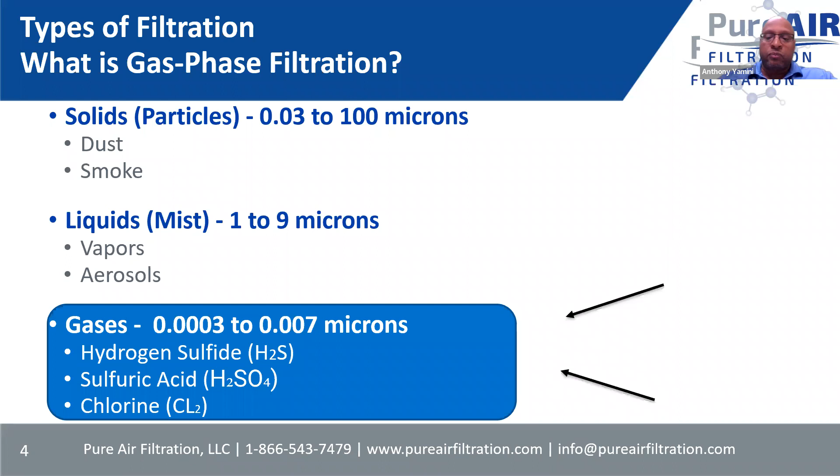To give you the size of gases, it's 0.0003 microns to 0.007. Just to give you a comparison, human hair is about 100 microns. That gives you an idea of how small these molecules are. Some of the common gases removed are hydrogen sulfide, sulfur dioxide, chlorine, ammonia, and other VOCs as well.

This illustration shows how, in a typical chemical filter, the odorous or contaminated air passes through the absorbent media and is purified. In the direction of airflow, you have the contaminated air. In this section, you have media that's already used up and spent. And this active transfer zone, or working zone, is the area that's actually doing the work of removing the contaminants from the airstream.

That active transfer zone progresses in the direction of airflow until the entire bed of media is used up. And here you have the unused media and purified air. This is very important for us when it comes to monitoring absorbent media life. And different adsorbents will be used for different gases. It really just depends on what the project requires, what's in the airstream.

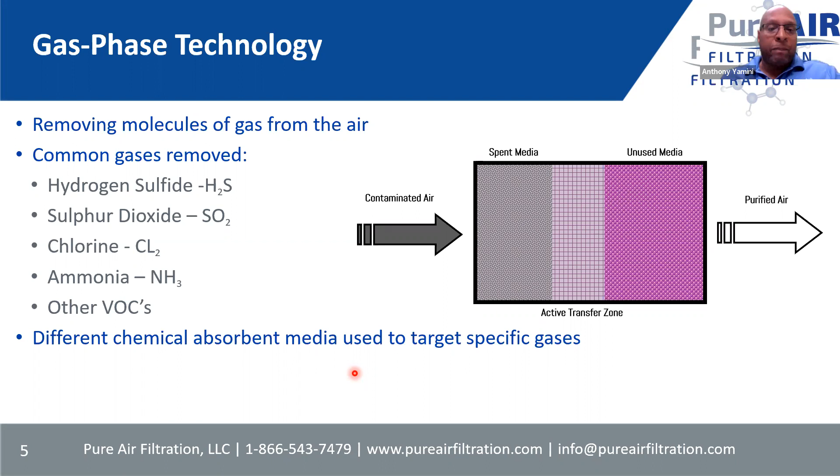So adsorption, typically the media for that is activated carbon. Activated carbons are very porous. So as those gaseous molecules come in contact with the media, they get trapped in those pores and are held in place. Great for removing some larger molecules. But this process is reversible. So in some cases, customers will use reactivated carbons, where some process removes those gaseous molecules from the carbon itself.

Chemical absorption, or chemisorption. This process is specific and is dependent on the neutralizing chemical and both the adsorbent and the gas being absorbed. The chemical oxidation converts the corrosive gases to inoffensive solids, which helps with management of the exhausted media. It turns it into a harmless byproduct to be disposed of like ordinary waste. It's non-toxic.

With some of those different media, in essence, you have some type of substrate, and it's impregnated with a catalyst that will react with that gas and turn it into a harmless byproduct. And this process is permanent, so you cannot reverse it. So once that media is used up, you have to dispose of it and replace it with new media.

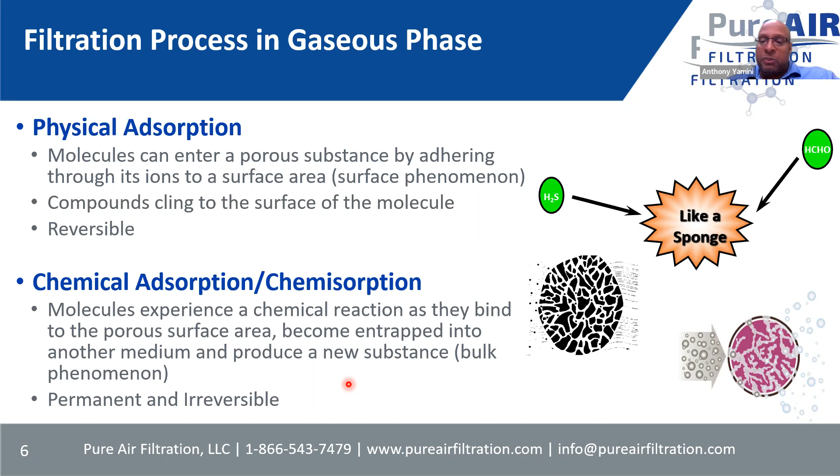So carbon versus PureAir engineered medias. So carbon, as I mentioned, is a highly porous substance that attracts and holds organic chemicals inside it. It has great surface area with a great internal pore structure network that results in a large surface area for the different gases and molecules to be trapped inside.

The only problem with carbon, it's not UL certified, so it can catch on fire, and in some cases it has. And there's really no method to determine the remaining media life of activated carbon. Really the only method is once you have the contaminated gas breaking through, then that's when you realize that it's time to replace the carbon.

With engineered medias, it is UL certifiable. Typically, there's no issues of catching fire. There are methods to measure the remaining media life. And also when that media is used up, it is non-hazardous. And as I mentioned, with our world-class laboratory, we can test the remaining media life of the majority of our engineered adsorbents.

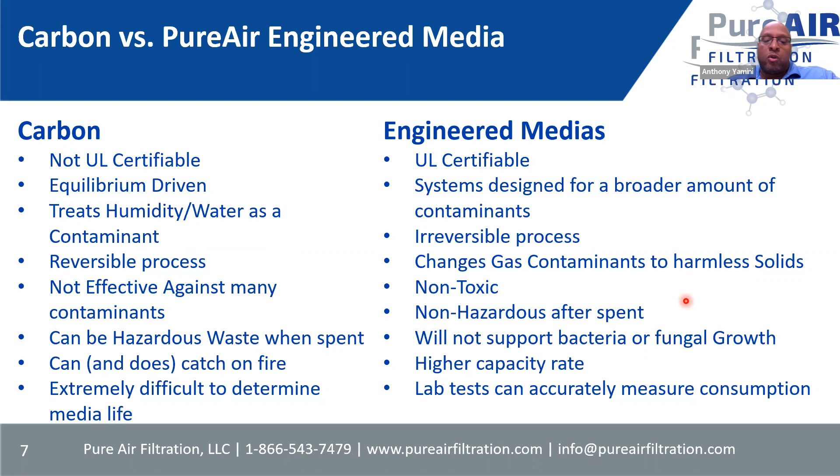Here's a slide of some of the different medias that we use, depending on the application. When it comes to activated carbons, we have our PureAir AC-X, an extruded activated carbon. It has become a standard over the past few decades, and it's very low cost but very effective. PureAir AC-C is a coconut shell-based carbon, considered some of the finest in the world for air purification, but it has a much higher pressure drop. So it really depends on the application and what makes the most sense.

On the engineered adsorbents, we manufacture those medias first using different substrates, whether it's activated carbon, aluminum oxide or alumina, zeolites, or clays. Then from there, we have the impregnates for that media, whether it's caustics, acids, oxidizers or catalysts, which are used to remove the different gases that may be present in the airstream.

Now, for oil and gas applications, we've had some great success using a blend of KOH impregnated carbon and potassium permanganate. It's called our PP blend media. The PP blend is a very broad acting media, and it will remove about 99% of different gases. So it's a very effective solution if you have a broad range of different gases.

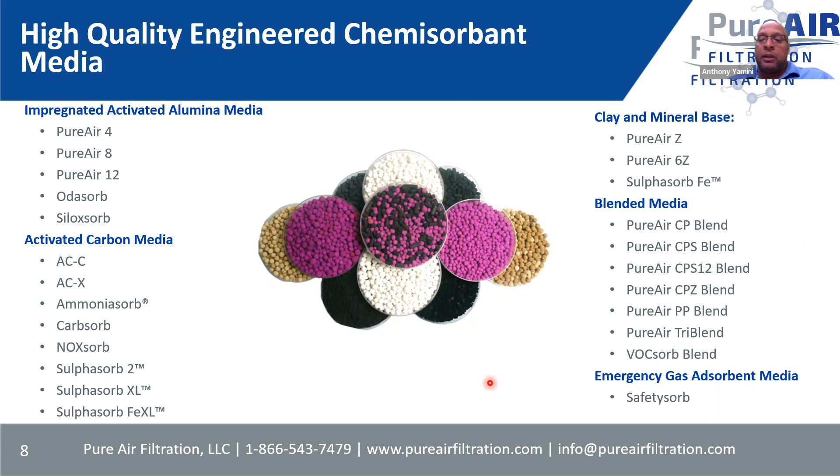One of the benefits of that media is that it has a color change component, because the permanganate-based media, the purple pellet, will actually go from purple to brown once it's used up. So that also gives the end users an ability to determine when it's time to change out the media.

We also have carbon impregnated pleated type filters. These can provide gas phase filtration, but at a higher velocity. So these filters can be installed in air handlers if you need some type of filtration, but most likely in applications where the gas levels will be very low. These might be a solution to provide some temporary gas phase filtration if needed. There are two different media types that we can bond to these filters: activated carbon, as well as a blended media of activated carbon and potassium permanganate.

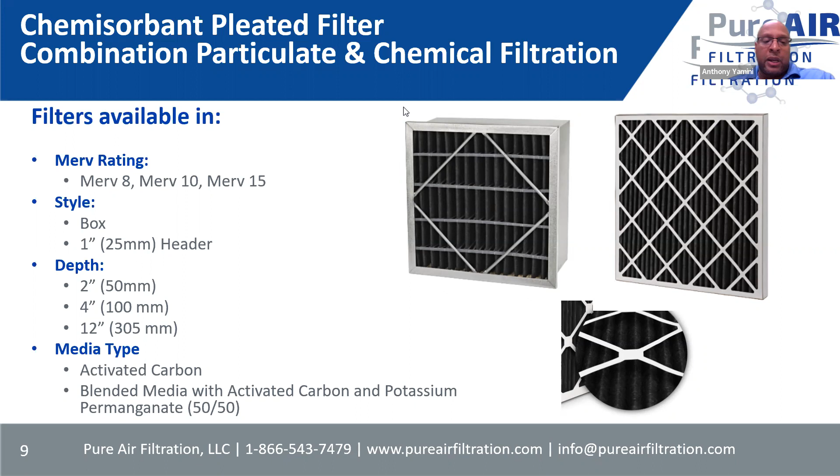Now, matrix filters are very similar to the pleated filters in that you can size these to fit into existing air handlers. But these filters contain a lot more media and are much more efficient, and they have a very, very low pressure drop. So you can run these filters at 500 feet per minute, like a pleated filter, and still achieve about 99% removal efficiency of particular gases. With these matrix filter structured media blocks, we can design them for ammonia removal, as well as quite a few acid gases, without creating any dust.

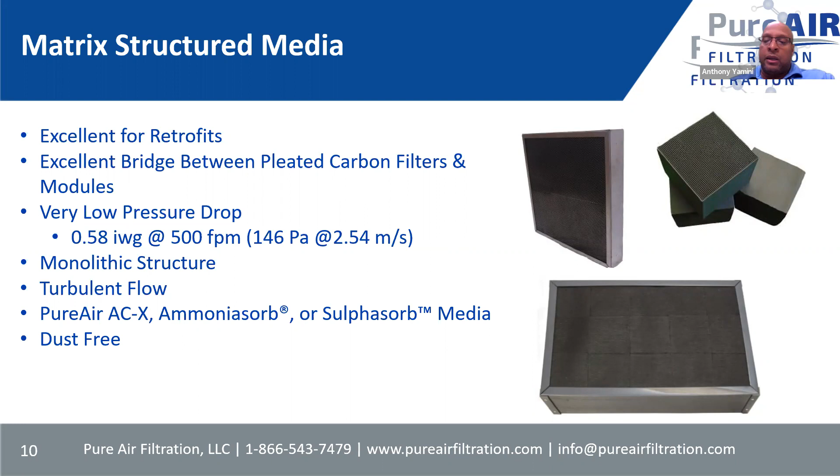All right, on the air scrubbing equipment, as I mentioned in the second slide, what sets PureAir apart is that we can provide customized solutions for just about any application. Systems can come in varying sizes and configurations, using that dry scrubbing gas phase technology. So we talk about modular units. They use disposable modules filled with that specific engineered adsorbent media. Once that media is spent, the module can be removed, disposed of, and replaced.

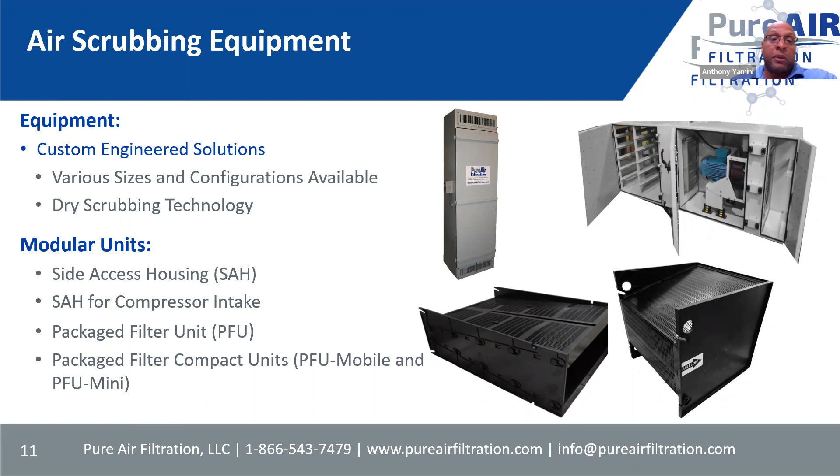Modular units also accommodate higher velocities. So you can provide those systems with velocities of 250 feet per minute or 500 feet per minute. It depends on the level of contaminants and also space restrictions, or different requirements such as footprint restrictions.

So deep bed units, they have a much higher amount or volume of media per system. So great for removing high levels of contaminants. The only downside with the deep bed systems, they will have a higher cost than a modular system, and also the maximum velocity through the deep bed system is only about 100 feet per minute. So you need a much bigger unit, depending on the contaminant level.

We'll be using deep bed units on a project in Saudi Arabia. It's called Marjan 10. I'll talk about that a little later here in the presentation.

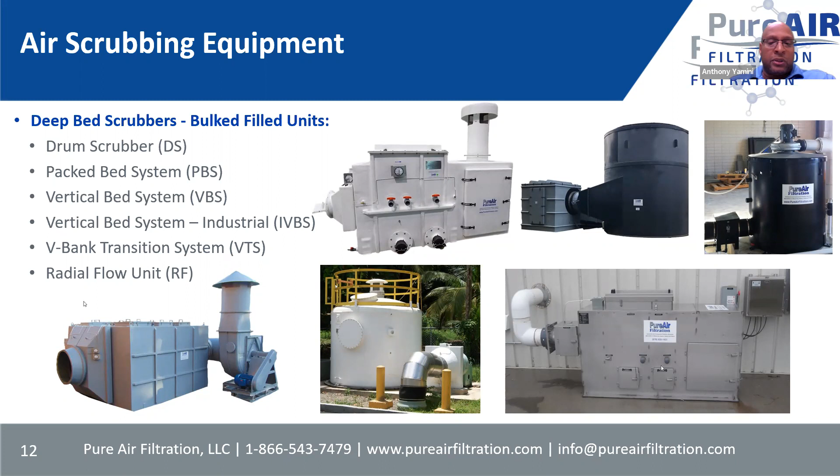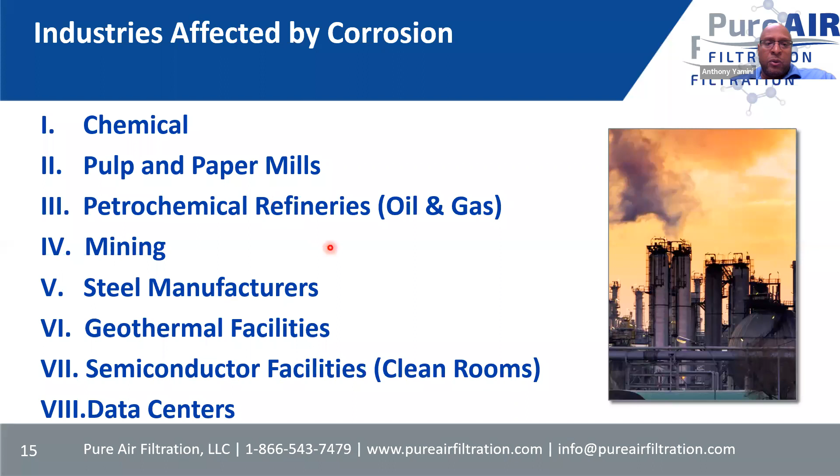All right. So industry is affected by corrosion. So the effect of gases in a controlled environment can be destructive. Corrosion on circuit boards accounts for 30% of all equipment failures in industrial applications. Damage includes disruption of electrical current flow and loss of signal. And acid gases are the most harmful. So rapid changes in temperature and humidity will accelerate the corrosion. So here's just a few of the industries affected by it.

So the areas within those industries that require some type of chemical filtration due to corrosion. So like MCC, motor control centers, that's the room where all electric motors are in a central location, which is very critical for plant operation. You have the operator control rooms as well. That's a room in which an operator monitors the operations of the plant, as well as ensures that everything is properly working, using computer controls.

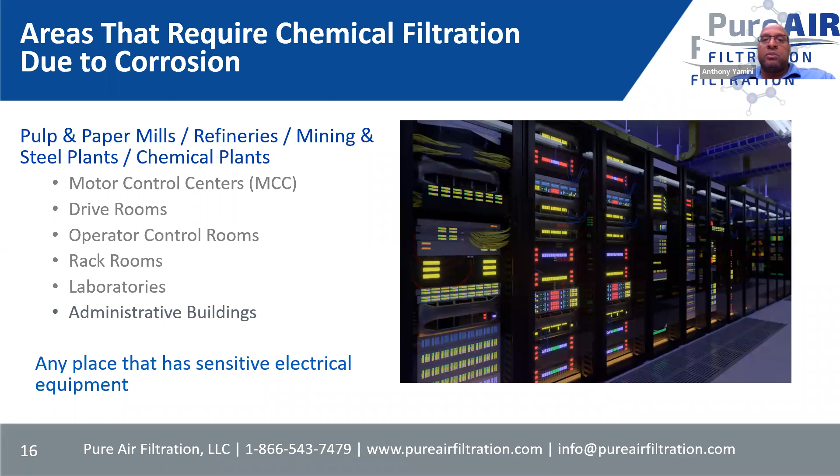So, in most cases, millions and millions of dollars worth of equipment in these MCC rooms, different operator control rooms. So it's important that the air in those rooms is purified and clean to prevent any downtime or any corrosion.

All right, for corrosion control. So, just a few items I wanted to touch on. So relative humidity, that accelerates the corrosion caused by gaseous contaminants in an exponential manner. And also equally important is temperature. So temperature fluctuations dramatically affect relative humidity and often cause local condensation. Salinity, corrosion rates tend to increase when water conductivity increases. The higher the salinity, the higher the corrosion rate.

And vapors, it is the gaseous product of evaporation. So vapor of some chemicals and some strong acids can cause corrosion. Dust is a universal contaminant, and that can come from human skin, just over time, causing dust, which could really cause some equipment failures.

So when the air quality does not fall within specified corrosion limits and other environmental factors such as temperature, humidity, etc., have all been ruled out, gas phase air filtration should be used to ensure we get those corrosion levels down.

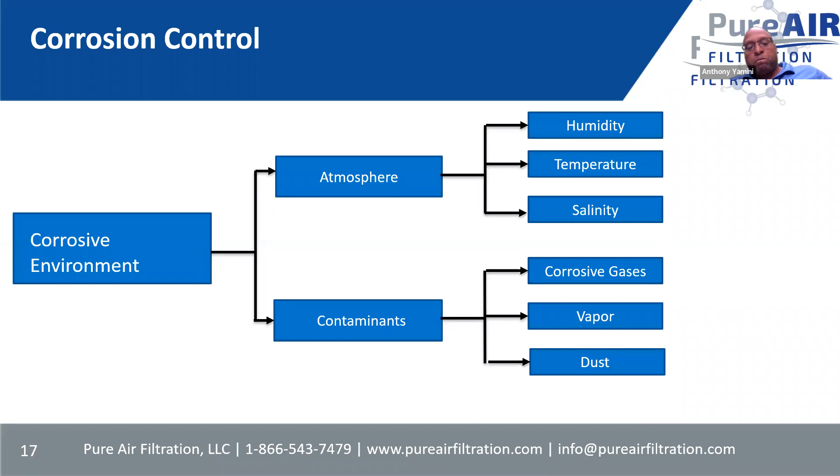All right, types of corrosive contaminant gases. You have hydrogen sulfides, sulfur oxides, nitric oxides, etc. So acidic gases, that's any gas that when dissolved in water will form an acidic solution. As examples, hydrogen sulfide, HCl, hydrogen fluoride, and sulfur oxides.

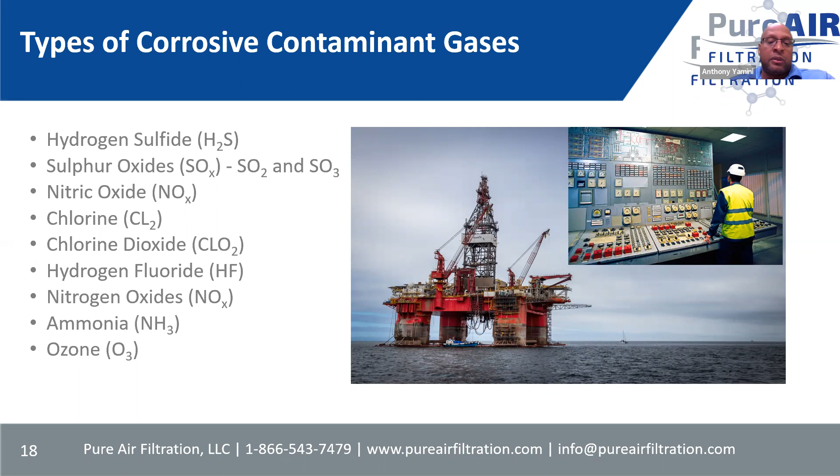So almost every one of the process industries and heavy manufacturing industries are plagued by corrosion on their process control equipment. So, I don't want to talk in absolutes, but it's pretty much 99% guaranteed you're going to have some type of corrosion in one of these heavy industries, potential corrosion.

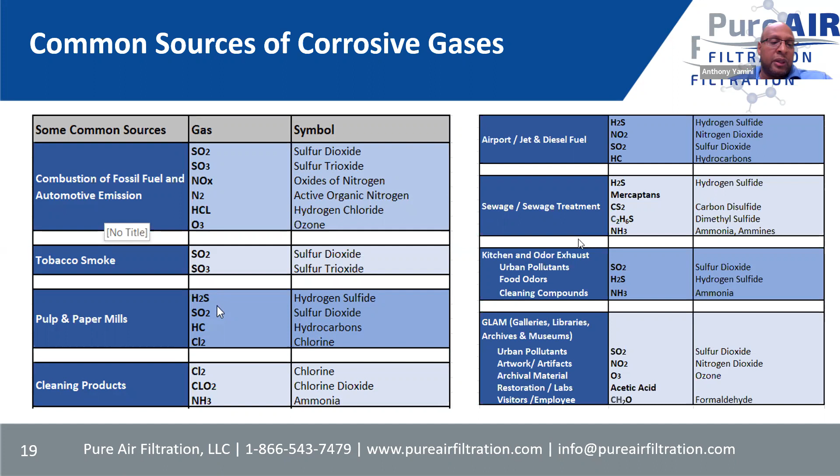So, common sources of corrosive gases. Here, as you can see, very common environments have corrosive gases. And this is just a very small list of hundreds of applications out there in the commercial and industrial environments. So I won't go through each one, but it kind of gives you an idea what's there.

All right. So, problems and equipment damage from corrosion. Damage includes disruption of electrical current flow and loss of signal. As the corrosion increases in thickness, the resistance decreases until functional shorting occurs. I want to give an example of a paper plant.

There are some studies that show that unplanned downtime on a single paper machine can cost over $20,000 a minute, and an unplanned mill outage over $1 million a day. So it's really important to ensure that these systems don't go down, because that's a big price tag to take care of just for unplanned downtime.

So minimizing that unplanned downtime is a challenge shared by all producers of pulp and paper in that particular application. Unplanned downtime kills profits and cripples commitments to your customers. That would also affect oil and gas as well.

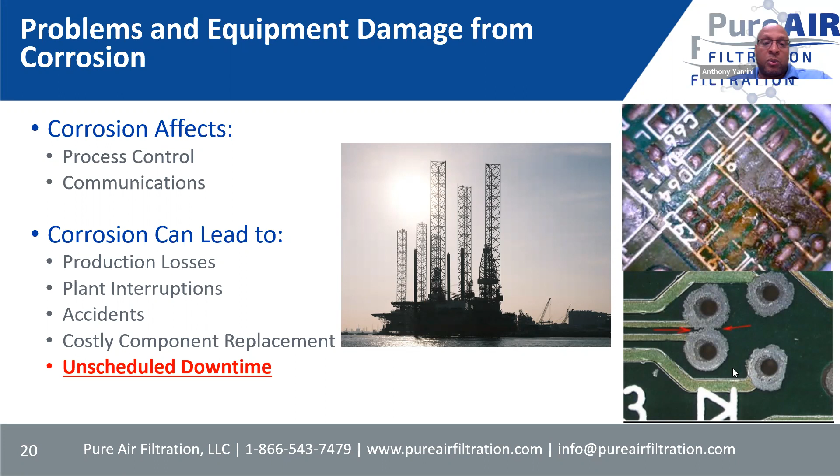All right. So the more conventional type of corrosion occurs when acid gases react with the metals themselves to form non-conductive salts. As the salt buildup occurs, the salt is forced back up through the pores of the metal onto the surface, thus causing a disruption in the contact point.

Gold is one of the least reactive elements on the periodic table. It does not react with oxygen, so it never rusts or corrodes. But gold plating will not stop the substrate from corroding or oxidizing. This is because thin layers of the plated metals have small pores which allow for corrosion to propagate through. This slide is showing systems with and without protection. It can give you an idea of the damages of those corrosive gases being unchecked.

All right, standard for air quality. This ISA standard was developed in 1985. The purpose of this standard is to classify airborne contaminants that may affect process measurement and control instruments. A few notable companies were involved with this development: Honeywell, as well as Exxon, IBM, Hewlett Packard, and a host of other companies.

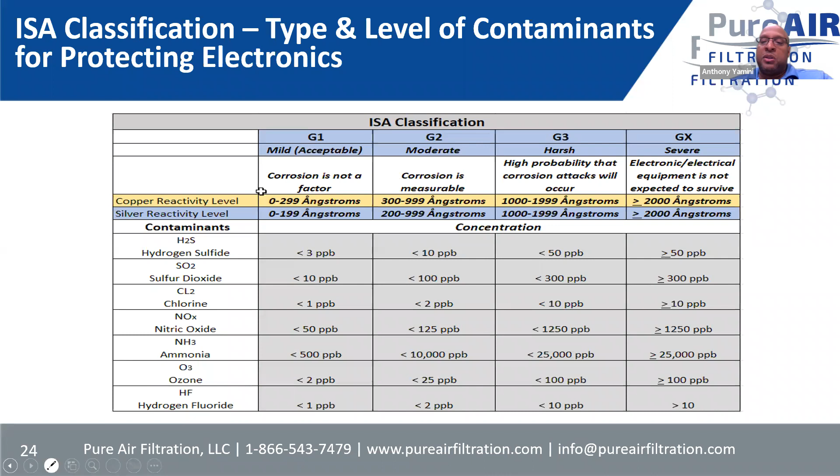All right, standard practices. Temperature should be maintained at the lowest temperature practical and consistent with personnel comfort and effective humidity control. You want to keep it at ideal temperatures, 70 degrees Fahrenheit, 22 degrees Celsius, plus or minus 2 degrees or so. But the corrosion rate can double for each 10-degree change in temperature.

Room pressurization for a sufficiently sealed room shall be achieved with approximately 3 air changes per hour, so keep that room pressurized. A minimum pressurization airflow of 5% of the room air volume per minute would be needed to achieve that. And recirculation airflow requirements shall range from 10 to 20% of the volume of the protected space, depending on the room sealing capability and the level of traffic going in and out of the room. People going in can also generate contaminants as well.

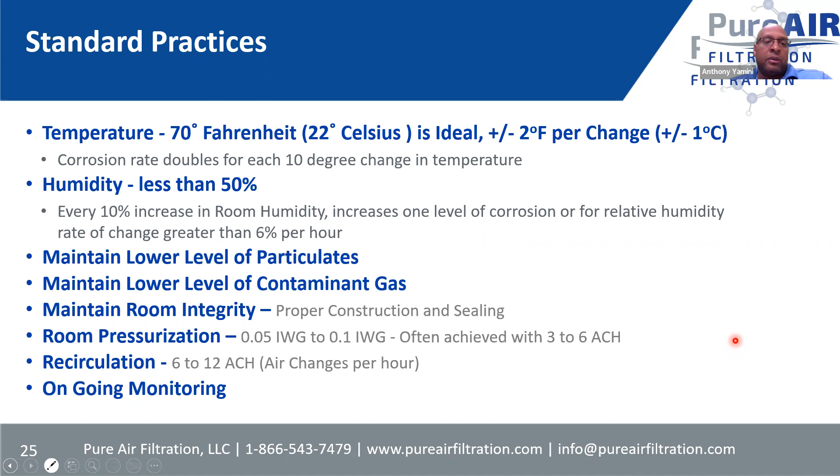And then as far as particulate, studies show that sodium chloride particles and ammonium sulfate particles strongly affect atmospheric corrosion rates of copper and zinc. So all of these items are carefully studied and analyzed when determining the best solution for gas phase filtration and corrosion control.

So, pressurization and air circulation, some of the basic designs. We look at each application individually, as a unique application, but what we provide will depend on the construction of the room itself or the area. How old is the building? Is it airtight? Are there any air leaks in the ducts or in the walls themselves? And also the relative humidity, which we want below 50%.

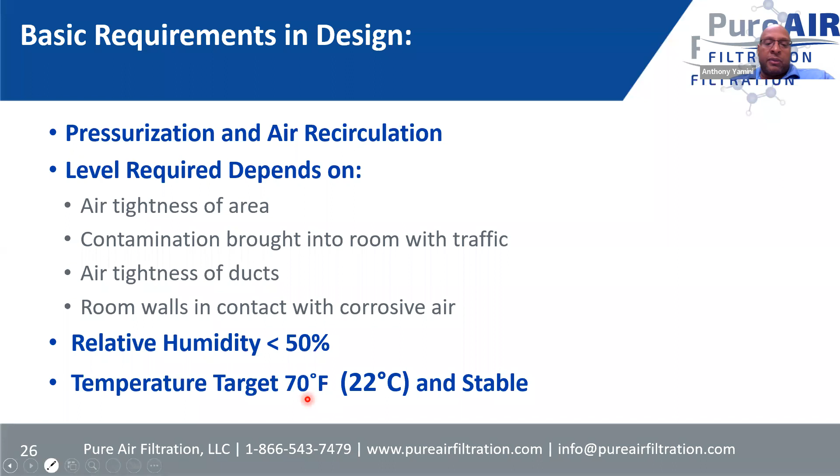So here's a basic room design where there's a pressurization unit, whether it's like a deep bed system or modular, bringing in the outside air. Then that purified air is fed into a heating, cooling, dehumidification unit or system. So that ensures that with the outside air, we control that relative humidity and that temperature. So clean air goes and gets conditioned before it's exhausted into the room or the protected space itself.

And also in this application, there's another system, a recirculation unit, which is a power package filter unit that will do further gas removal to ensure that room is gas free. We're getting the pressurization to keep any gases out, as well as recirculating the air inside the room.

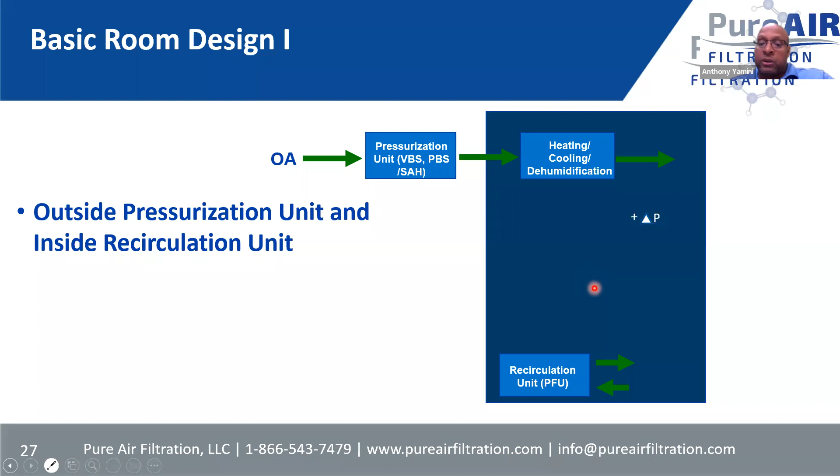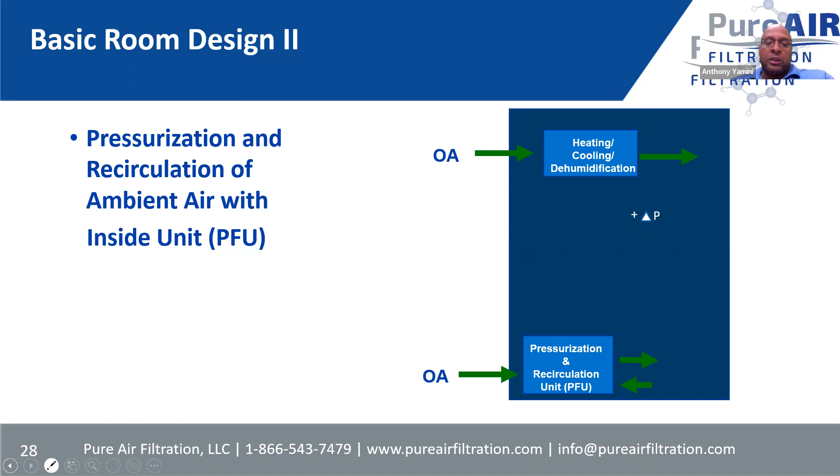In this room design, we're actually bringing in all outside air in this scenario, but we're just using a pressurization and recirculation system to help pressurize that room, but also clean the air as well. So depending on the room size and the contaminant levels, this may be a good, cost-effective option for gas phase.

And then the last design here, where all of the systems are outside of the room itself. So all of the purification and pressurization is done outside of the room. So you bring in the outside air, purified and conditioned before it goes into the space, as well as recirculating the air and controlling that temperature, because as it leaves the building, it's going to be affected by the outside conditions. To condition that back into the recirculation unit, then back into the room.

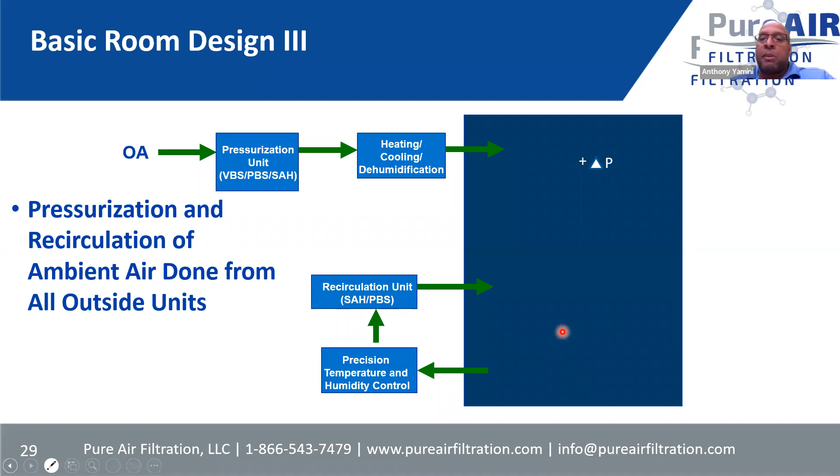So a few different scenarios for that, but again, we look at each project and application individually to determine what's the best solution.

So a comparison of the different chemical filter types: the deep bed systems, as I mentioned, for more heavy industrial applications, higher levels of odors, but you're going to have that 99.9% removal efficiency, even just for one pass of media. But the max velocity is 100 feet per minute, and it has a higher cost than the other solutions, but also has a longer media life.

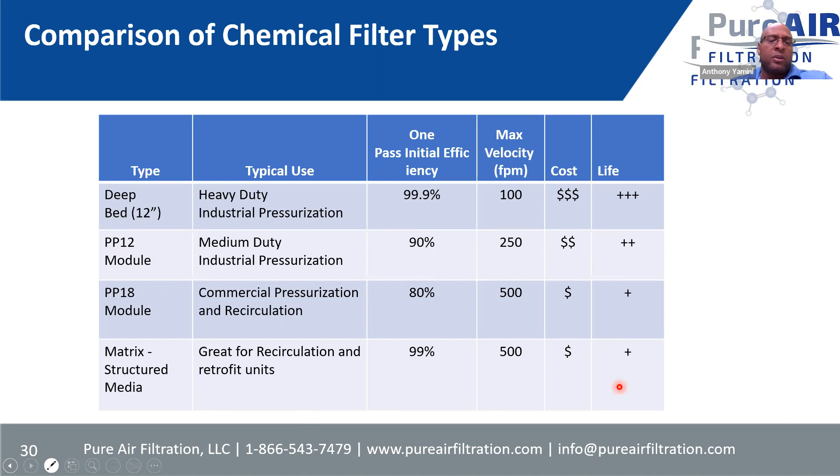And you have our PP12s, our PurePack 12 modules, PP18s, more for commercial applications, and then you have the matrix structured media filters that we would use in some applications to give you good removal at a higher velocity, and lower cost, because the housings can be a lot smaller. So it just depends on the applications and what's present.

All right, air quality monitoring. So at PureAir, we have a world-class laboratory for testing our medias and also doing a lot of research so that we can come up with the best media formulations for optimum gas removal. So we're constantly hiring new experience and new talent to help us achieve those goals.

And of course, the gas phase media has a finite life to it, and it's going to be based on whatever gases are present and also the amount of that gas. So it's critical to have that laboratory that can first develop the proper media for each application, as well as test that media to determine the remaining media life, and also conduct quality control and quality analysis to ensure that every pellet of media that leaves our facility is of the highest quality.

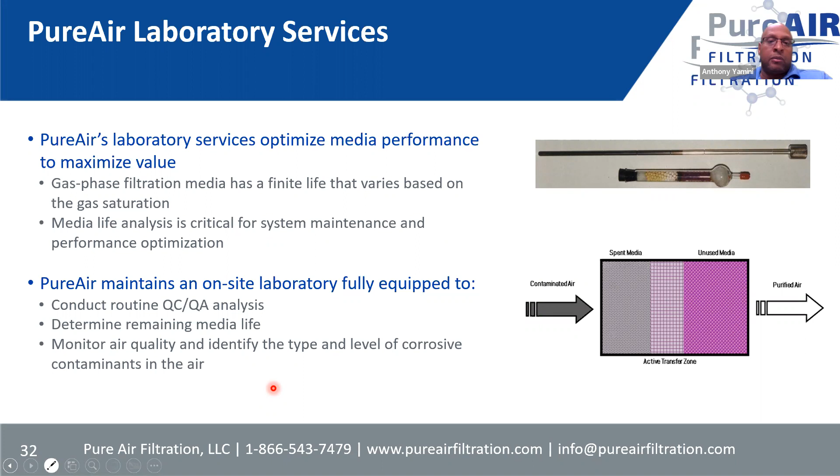And quite frankly, that's why we're the world leaders in the removal of odors, gases, and vapors. We put that work in, that time for that research, to ensure properly functioning and highly performing systems.

All right. So back to the ISA standard as far as determining corrosion in a particular space. One way to identify the G level of a room is to provide these corrosivity test kits or coupons that can be placed in the room for 30 days, and they have a copper and silver strip. So once that's hung in the room for about 30 days or so, send that back to us for testing, and we can determine that corrosion level or G level for the room, and then from there determine the best type of equipment to use.

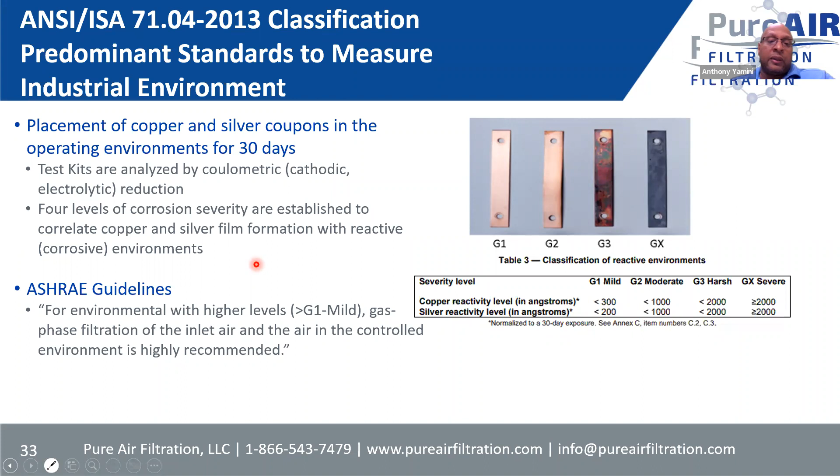So for environments that are higher than G1, we recommend some type of gas phase filtration on the inlet. It's very highly recommended. And here's what the corrosivity test kit looks like. You have a copper and silver strip. So once that information is filled out, we recommend placing that in the room for 30 days. And there will be instructions on how to send it back to PureAir for testing.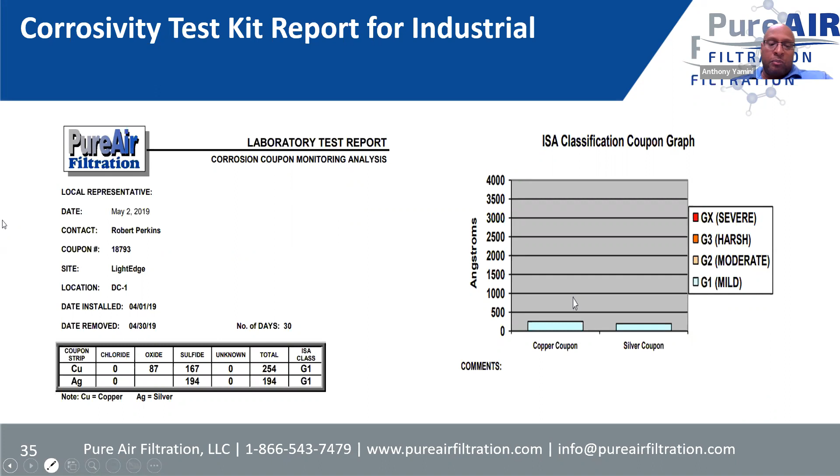And also for air quality monitoring, we have the corrosivity test kits, but we also have an electronic corrosivity monitor. That continuously monitors the corrosion G level in a room to ensure it doesn't rise above G1. This monitor is placed in the room, and it actually has the copper and silver sensors. We're also measuring the humidity, the room pressure, as well as the temperature. So we have all that in one device, and that signal can be read back to the SCADA as well, so it can be monitored remotely.

And we also have media testing as well. At our laboratory, we can test the remaining media life, but we also have the different medias that change color, as well as manual media bed indicators, which are shown here, as well as electronic bed monitors, so we can monitor the remaining media life and send alarms remotely as well. So very useful and effective, especially in our municipal applications, but we're also using this for any deep bed system for industrial as well. A very, very useful tool for customers to determine when it's time to change out the media before you receive any breakthrough.

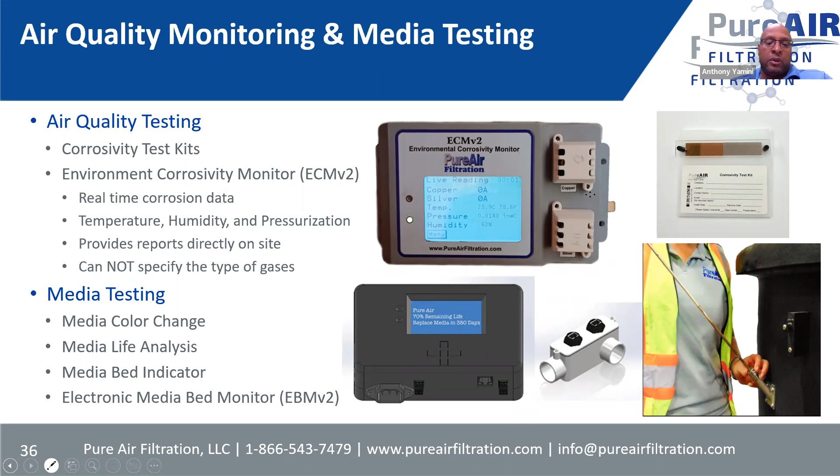All right, so oil and gas applications. I just want to highlight a few oil and gas applications in the Middle East that we worked on and are working on. Again, each project was unique in itself. So I've only touched on a couple applications, I think it's 3, but we have, I won't quite say hundreds of applications in oil and gas, but we have quite a few.

So this is the KJO project in Saudi Arabia. We worked on this one, and it was a refinery on the border of Kuwait and Saudi Arabia, the Al Khafji joint operations. They had very, very high levels of H2S. This project was a joint operation between Saudi Aramco and the Kuwait National Petroleum Company. They needed systems to protect their employees in case of a toxic gas release of H2S when they have to shelter in place. They also needed some systems to protect their electronics from corrosion.

So the solution that we came up with, we gave them some side access housings, which were modular units, as well as our deep bed system, which is a V-bank transition system. The modular units were for high airflow applications and lower gas levels, and the VTS, the deep bed system, for high levels of contaminants. For the V-bank transition system, we used our hydrogen sulfide scavenger media, which is Sulphasorb Fe. It works great at very, very high levels of H2S, but it's more like a roughing filter. I call it an H2S punching bag. It's going to take out, say, 90% of the H2S that's there.

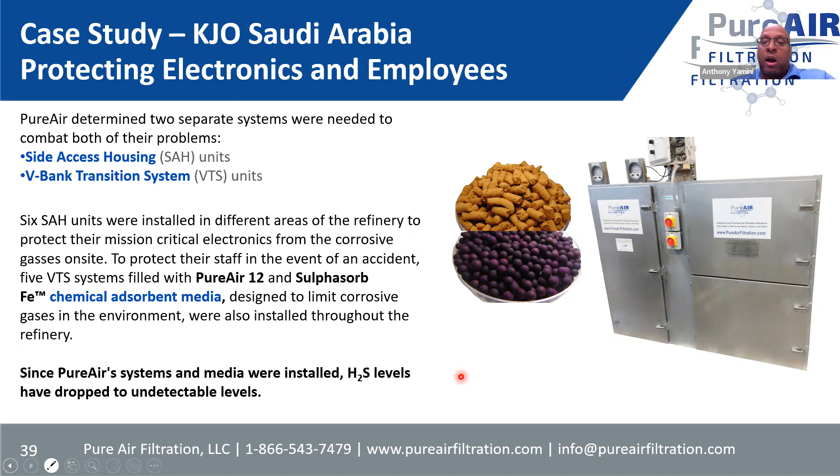So another project for us, this was the Umm Lulu field development, and this was in Abu Dhabi. It's off the coast of Abu Dhabi, and it was actually 2 phases for this project, where they required pressurization on their offshore oil platforms. We were successful in providing the gas phase filtration chemical filter units for both phases, phase 1 and phase 2. This was a very time-consuming, very involved application, because the requirements were very stringent as far as the type of material required for the systems, the necessary paperwork, factory acceptance tests.

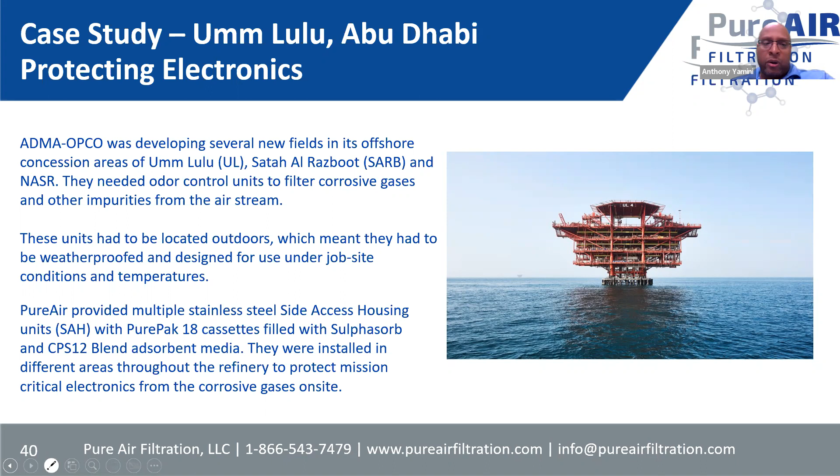So, to give you a little background, these units were required to be very robust: 3 millimeter 316L stainless steel, also coated with a special marine coating for that corrosive environment. The coating itself had almost 8 pages of specs. Also the units were all welded. And on top of that, they were required to be ATEX certified. The entire system had to be ATEX certified. That required us to bring in a company, I think it was Bureau Veritas, to come in and certify each one of the units to ensure that everything was explosion proof and ready to go.

So it took a lot of resources here at PureAir. Just the paperwork alone for this project was very, very time consuming, and definitely an eye-opening experience for us. Phase one had a few challenges that we were able to work through, but it really worked out well for us on phase two because we had that experience in providing these systems.

And I will say that, to my knowledge, we're probably one company that can provide these 3mm 316 stainless steel systems, marine coated with the ATEX certification. I haven't seen too many companies provide that, but we were able to, and the system's actually working quite well.

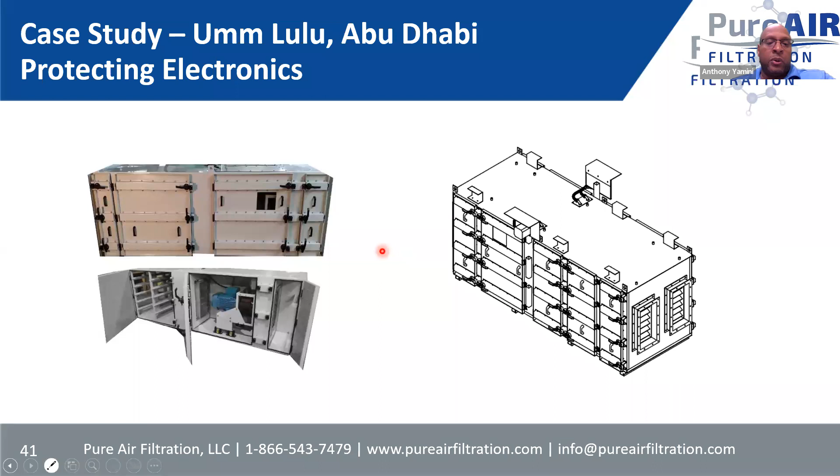And here is just an actual photo in this slide showing what the units look like. Just kind of give you an idea with the redundant blower systems, very heavy duty, all the explosion proof controls as far as the lights inside the blower section, viewing windows. So very, very high. And this here is Lulu 2. Units were identical. Some were bigger than others, but kind of gives you an idea of the robustness of these systems.

And we are currently working on, we have in-house, the Marjan oil field that's in Saudi Arabia. So it's another oil and gas application on an oil platform off the Saudi Arabian coast. And so we currently have 2 projects we're working on now. Marjan 4 is actually currently in-house for seven SAH units. And it has 4 passes of the PurePak 12 cassettes filled with the Sulphasorb media.

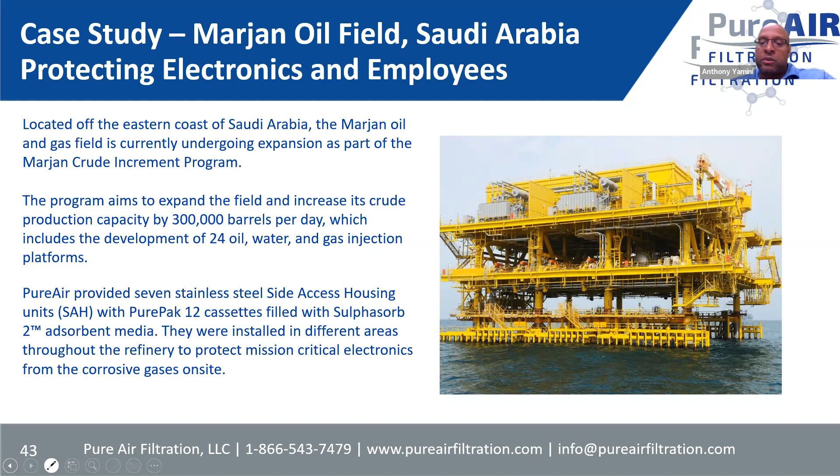So we're excited about providing this project for the Marjan oil fields, and there are also numerous other Marjan projects that are coming back on the radar as they were shelved due to the pandemic. So now we're starting to see them come back to life. So it's exciting, and we're looking forward to it.

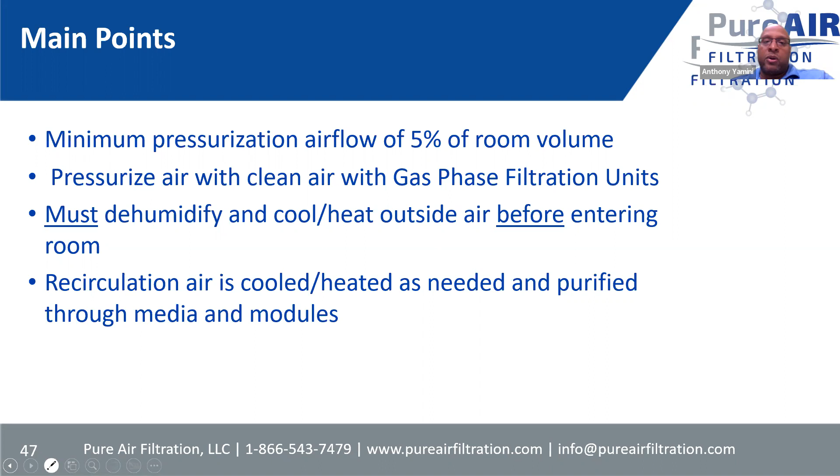All right, solution scenarios. As I mentioned before, for pressurization, you want to have that minimum airflow of 5% of the room volume to ensure we're keeping those gases out. And as far as recirculation, airflow requirements shall range from 10 to 20% volume. So make sure in that room we're keeping track of the temperature, keeping it within range, as well as the humidity, to ensure we don't create an environment for corrosion.

All right, so PureAir filtration, the full solution. As I mentioned previously, with our company, we have over 50 years combined experience in providing gas phase solutions. So first we identify the problem, and we determine what's going to be the best solution for that particular problem. As I mentioned, we have world-class laboratories. We're constantly improving the company with research and development to make sure we're always on the cutting edge and forefront of gas phase filtration. And also, we're probably the only company that can monitor the remaining life of the media as well as the environment for different applications.